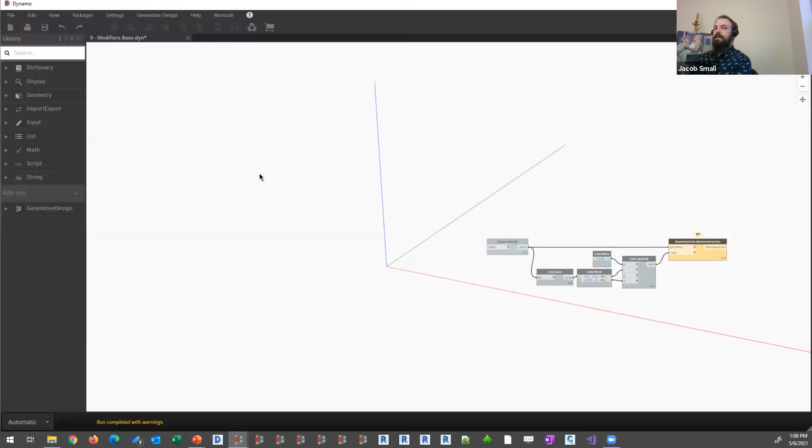Feel free to add in anything else while I spin up over here and launch our first demo. I wanted to add that if you've been paying close attention to the last couple sessions, there is a speed difference between creation of abstract geometry and creation of physical types. But there's also a speed difference when it comes to taking an already created thing and moving it to a new place. So the ability to take a created sphere or cube and move it somewhere else is going to be a little faster than actually creating that cube in another place. So if you're looking to replicate geometry across different places, utilizing these abstract methodologies such as translate will net you a speed gain in Dynamo as well.

So the specific section of the library we're going to focus on today—because any particular geometry type may have its own modifiers, so if you go into curves there's a way to modify curves, if you go into surfaces there's a way to modify that—but the session today we're going to focus in real tight on the modifier section under geometry. So geometry, modifiers, geometry primarily. You'll see all the different nodes we're going to cover today are listed out here.

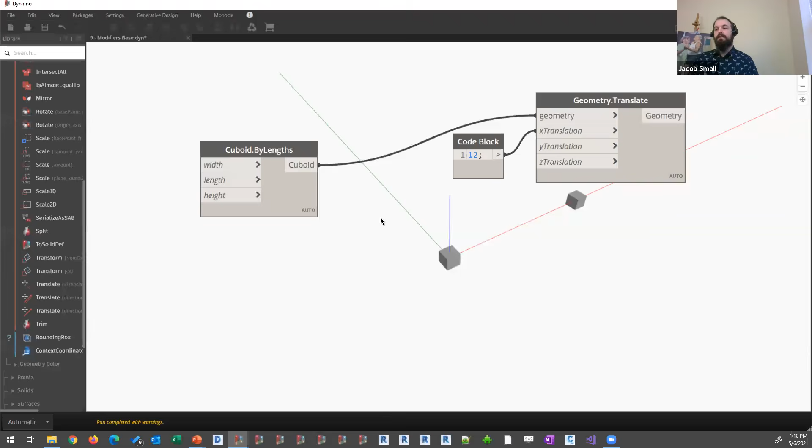We're going to start by going over these translate nodes, and this is going to really demonstrate what we mean when we say non-destructive. I've placed my first cuboid here. You can see what happens when I select it, it gets that blue highlight. Now I'm going to move this with the geometry translate node on an XYZ value. Let's move this on the X axis by just 12 units. We wire that into the X. 12 units might have been a bit far based on how I was looking, but you can see I now have two cubes—the one I've moved and the one that was previously created. This can be really useful because I can always go back and reuse the previous cube, or I can continue to manipulate the geometry I created before.

The next method of translation is by just direction. So in this case, we'll take the cuboid, wire this in, and this needs a direction. You can see when I hover over it, it says I need a vector. We can quickly make a vector by coordinates. We'll move this on the Y-axis by, I don't know, 10 units seems like a good value. And you can see once again another cube was created, this time up here.

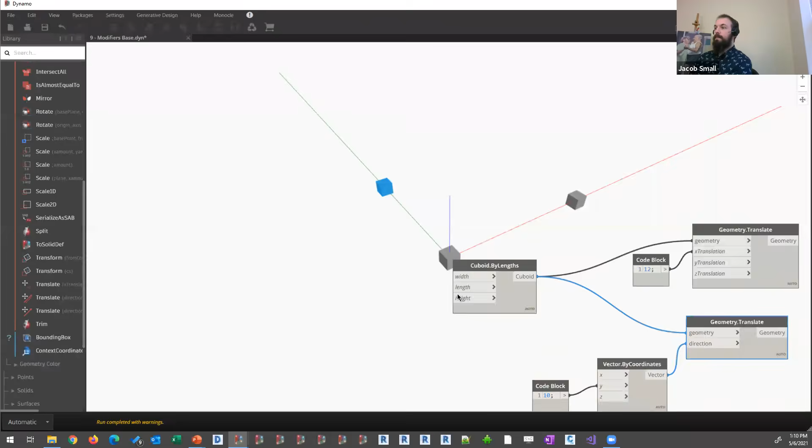One more cube that we're going to try and make here, and we're going to leverage the last translate method, which is by direction and distance. So as opposed to just saying what's the path that you want me to move this shape, or how far on the X, how far on the Y, how far on the Z, this is going to say take that geometry on a given path. We'll move this on just the Z axis.

And how far would you like me to go on that path? Let's move it by 5 units, seems like a good number since that's where my finger landed. You can see we've now created a fourth cube. So now I have 4 different cuboids, but I can always go back to any one of those and manipulate that one. So rather than manipulating the first one, I wanted to manipulate this one.

Whoop, helps if you wire stuff into the right data type. You can see we can move those different pieces around. So that's what we mean when we say non-destructive.

All right, I'm going to leave this up on screen now, and I'm also going to change this to be a little bit narrower of a value. Let's go to 0.75 on my X, Y, and Z values.

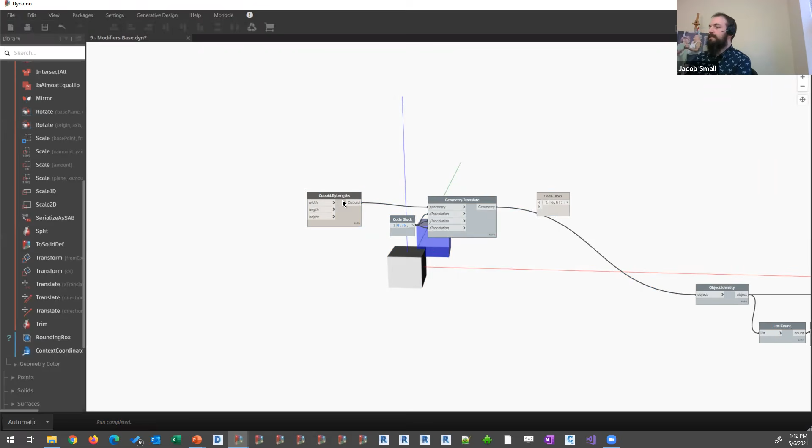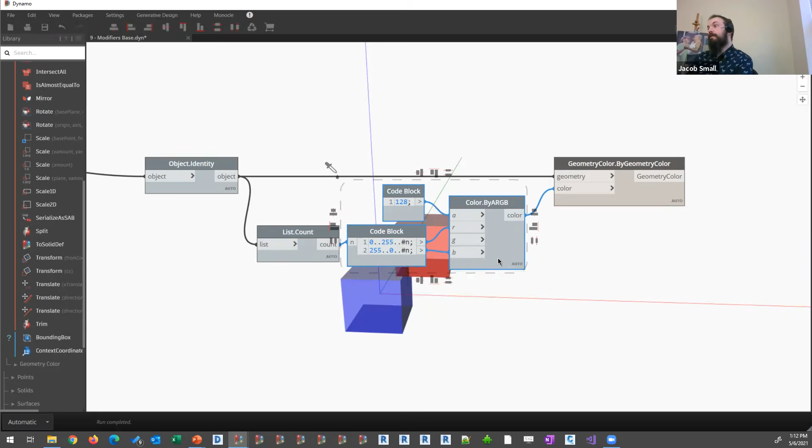You can see how those two pieces sort of pull together. And then I'm also going to do one last piece. I'm going to wire this in so that we can see these pieces in different colors. Let's take a quick list here, A and B. I'm going to wire this in as index A and this in as index B. This should allow us to more easily visualize the different geometry shapes as we continue to get into our different modifier types, coloring one piece of geometry one color and the other piece the other. This was done with a simple color by our alpha RGB value nodes and geometry color by geometry color node.

All right, so our next piece is split. Split is basically going to take 2 different pieces of geometry that interact in some way and pull them apart into separate pieces. So this is how you get a hemisphere from a sphere, a grid of squares from a surface, non-overlapping segments from overlapping segments, and so on. It's going to give you both halves of those 2 individual pieces, so it's not just the pieces that overlap, not just the difference. It's going to give you the combination of the two.

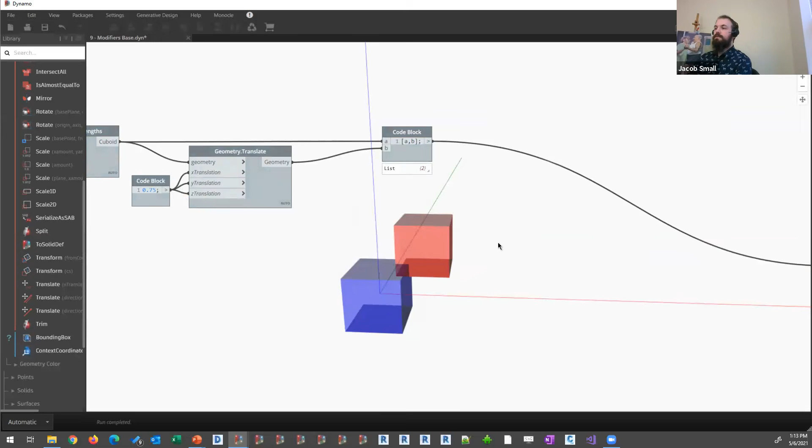So to do this, we're going to take those 2 nodes we had before. I'm going to come back into our geometry library. Once again, we're under geometry, modifiers, geometry. We'll pull out the split node. I'm going to take our first cube, which I've named A, that's the blue cube, and our second cube, that's B, and wire that in as our split. We'll turn off the preview on this, and then wire this into here.

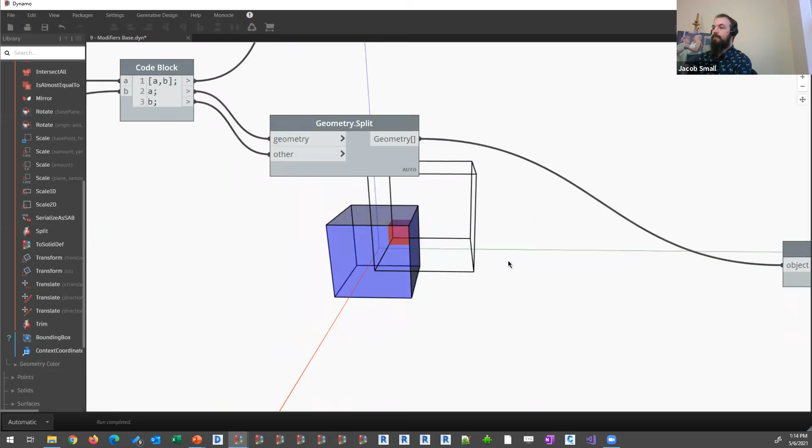And you can see this is now coloring the 2 individual pieces. Now it can be a little hard to understand where stuff came from, so I'm going to do one last thing here. I'm going to take my list of A and B, and we'll quickly pull the edges so we can visualize where stuff came from. And then from each edge, pull the curve geometry. So these were the original outlines of those 2 cuboids. You can see the piece remaining in that red cube among those 2 is the piece that is kind of overlapping where those 2 pieces intersect. Let's disable the translucency so we can see that a little clearer. Hopefully that makes some sense.

Anything to add to that one, Sol?

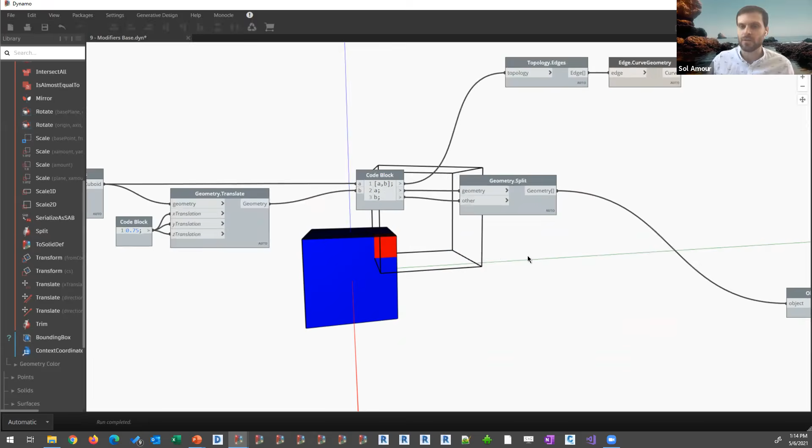Just one thing, which is you'll notice there are multiple different ways to do things inside of Dynamo. In terms of the translation that Jacob showed earlier, there were 3 or 4 different methods you could use to do that, and they're all useful in their own right in different ways. It doesn't matter which one you use, so long as you get the result you want. But sometimes it's better to do it with math, with vectors; sometimes you might want to just give it pure numbers for XYZ translation. That'll be a common theme with multiple of these different modification methods in Dynamo—there may or may not be multiple different options that best fit the problem you have at hand.

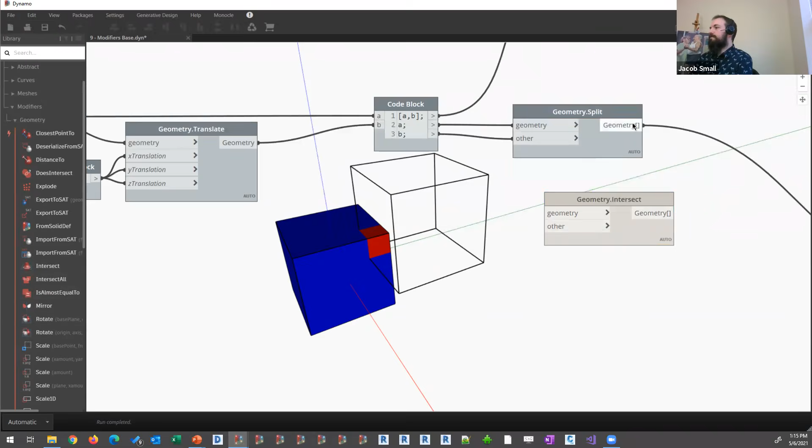So that's the geometry Intersect node next. I'm going to go into my geometry menu, under modifiers, and select Intersect. We'll wire this over, no need to disable previews yet. We're going to take Shape B, our red cube, the upper cube, and Shape A, the blue cube, the lower cube. Notice I now only have one cube remaining, shown right down there. The reason for this is it's looking at just the combined pieces of geometry that are common amongst the two pieces input into this node.

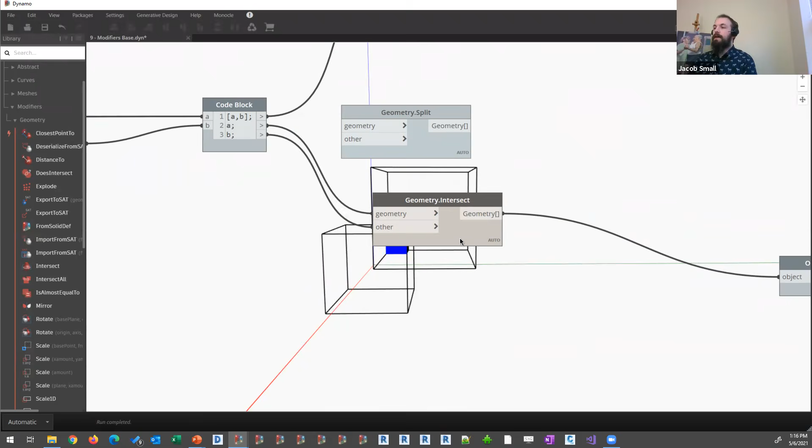On to DoesIntersect. The way I like to describe it, it's built-in clash detection, because everybody likes to make sure their model is coordinated. No new geometry is actually created with this one—it's just going to tell you if the two pieces touch. So we'll come back here and take our DoesIntersect.

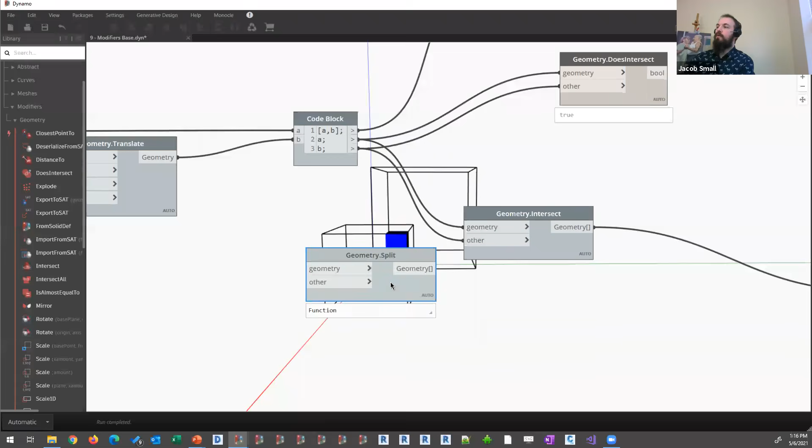Again, this takes our initial geometry. We're going to take Cube A, originally the blue one, and Cube B, originally the red one. You can see it just produces a quick true or false value. In this case, the two pieces touched. But if I modify this cube I moved—the red cube we shifted out of space—if we moved it by 2 units instead of 0.75, the two cubes are now located a bit further away, and you can see they no longer touch. So there is no intersection, and that Boolean is now going to return false.

I often see this used in combination with a List Filter by Bool Mask, where if I had a bunch of cubes in space and wanted to know which of them might touch this other shape, we could quickly do a DoesIntersect and then filter by Boolean mask to pull out the content that just intersects the shape we're targeting.

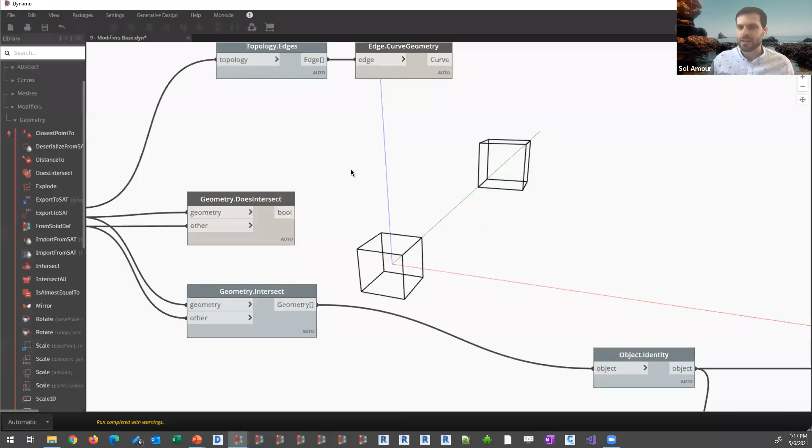Anything to add to that one, Sol? Yeah, if we're talking about clash detection, a real world application is that you really want to use these abstract types. DoesIntersect could be considered an abstract type you use first before trying to connect every single thing to every single thing—it's like a filter or a pre-pass. You want to go and collect only the relevant things to each other, so you can see if only things intersect, then potentially join those geometries in the Revit space, or do some downstream Dynamo operation with them. What you want to avoid is trying to do every single thing to every single thing at the same time, because the bigger your problem space or the more geometry you're using, the slower things get, purely from having to compute those things. If you pre-pass them and say I only want the things that are touching, Dynamo doesn't need to consider anything else. You just do a filtration pass with a List Filter Boolean node, and then you only work on the actual things you care about at any given time. Cool, well said.

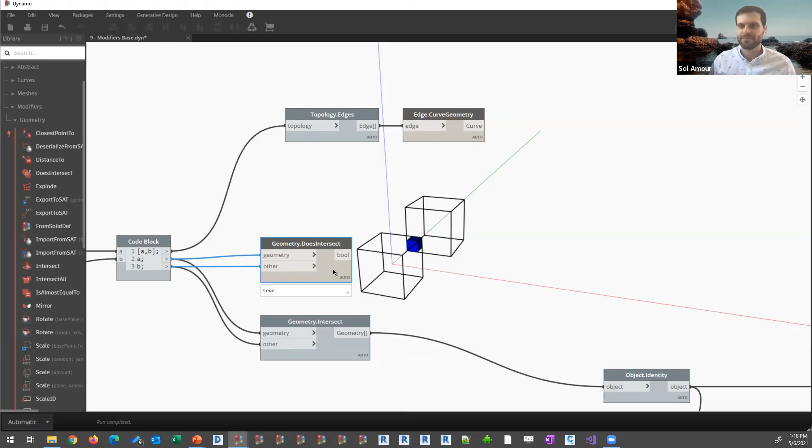Next up is Explode. Explode is pretty much what you might be used to in AutoCAD or perhaps even Revit if you're doing CAD imports, where we basically pull the core components that make up the geometry. This allows us to expose the primitive pieces that make up the larger, more complex shapes in a pretty direct manner. I use it pretty often for stuff like, if I'm not sure whether I'm going to have a surface, a polycurve, or a cuboid, we can always just do a quick geometry explode and quickly understand what that thing is made up of.

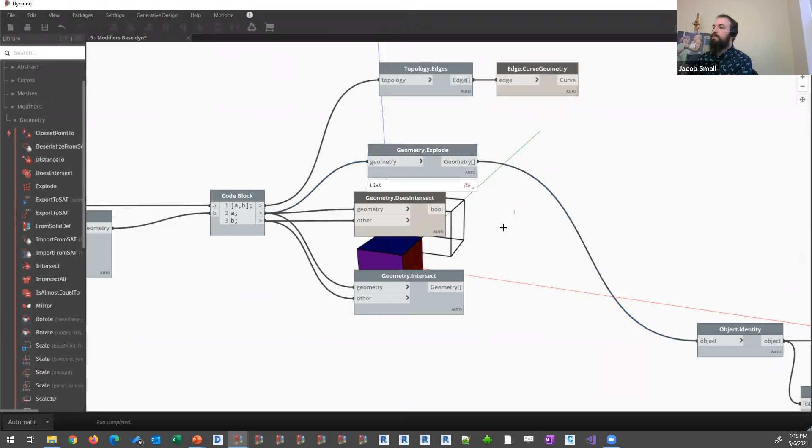Once again, looking at how that works, we'll take the geometry explode node from that same section of the library, and we can explode an individual piece, which looks like this. Now when I wire that in down to here, you can see we're going to color each one of those cube faces a different color, varying from very blue at the top to very red on the backside.

Right, so that's sort of the order that those cuboid faces were created. If we did want to do this on a larger sequence, we could wire this in. But notice I'm now coloring one cube blue and one cube red, even though if I look at my data preview, this is a larger set.

And that again comes back to our list structure, right? So if I look at this, we're lacing all of my red color gets mixed with the first item in the list, and all of my blue color gets mixed with the first item in the list, all of this stuff. Then all of my red color gets mixed with the second list. So if we wanted to individually color those faces, we'd have to use those flattened nodes.

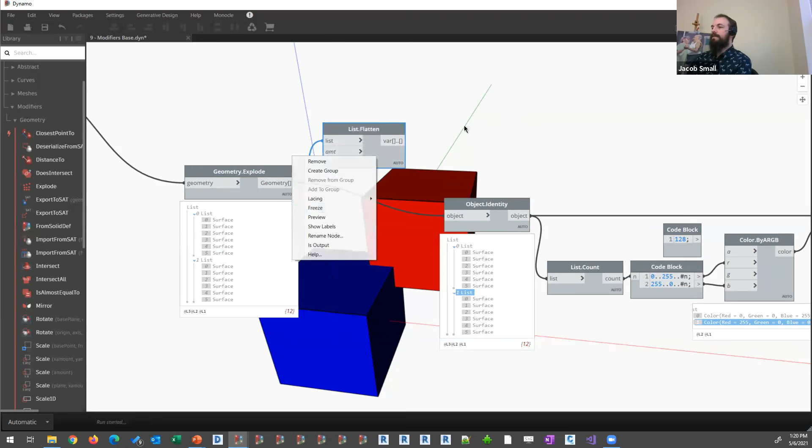This is why we covered some of that other core list management stuff. This is why we covered that list management stuff before we got into geometry manipulation, because it's really tough to do a lot of stuff if you don't have that understanding background of where stuff comes from.

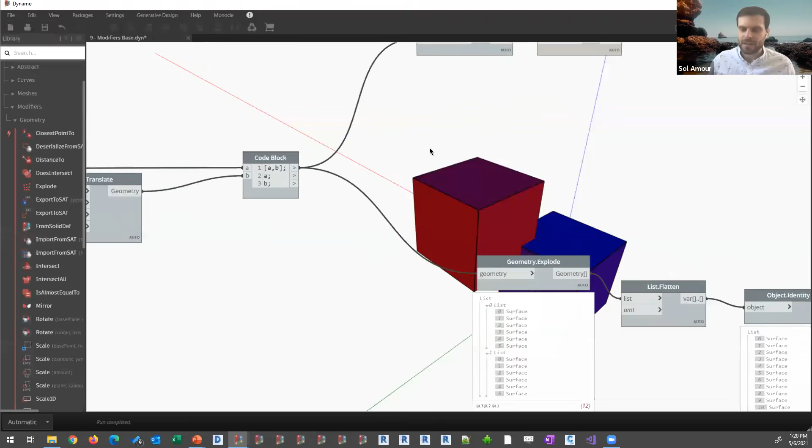Anything to add, Sol? Yeah, so geometry explode can be really useful just to get down to the baseline components, like Jacob said. So if you have a NURBS curve or a polycurve, in this operation you should be able to explode these into some baser components. Sometimes you'll get what's called just a curve, which is the higher geometry class inside of the curve space, and to get from a curve to something real, you probably want to use the geometry explode node as well.

All right, on to mirror. We're going to go through a couple modifiers now that are really similar to what you might be used to seeing in your CAD and Revit command base. So for mirror, basically you just define what plane you want to mirror about, and it's going to take the geometry and create a new copy of that geometry on the other side of that plane.

Unlike Revit, there aren't as many concerns as you might have in your typical BIM world, right? I always get upset when I see somebody mirror a plumbing fixture because now my hot and cold inputs are on the wrong side of the fixture. The flushometer's on the wrong side. That leads to ADA concerns, accessibility concerns and stuff like that. So one great thing about being in the conceptual environment is you don't have to worry so much about that.

But the way this node works, I'm going to go ahead and place one of them on the canvas. You can see it here. So it takes our initial geometry, but to use this we also need that mirror plane. So I'm going to take the list of both geometries, wire this into the flatten. I'm also going to turn off the preview on this. And I now have to quickly build up a plane.

If we remember, planes are under our geometry abstract section of the library. We'll build one by origin and normal. It automatically uses the default input, but let's go ahead and create a point by coordinates at, say, -5 on X and -5 on Y. We'll use that as the origin, and then for normal we need a vector, and we'll do -5 on Y and Z.

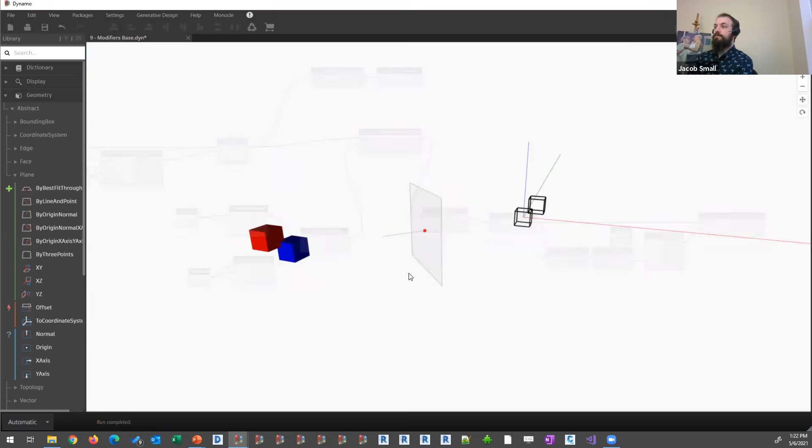Now when I look, let's actually change that to here, so you can see how that places that location. And now I can wire this plane up into my geometry mirror node, and the two cubes get flipped right over to the other direction, right? So this can be really useful if you have larger sets of geometry that you just want the inverse of, or if you only want to model half of something, just like in the CAD days where you might trace out the right side, and then go ahead and mirror that over and get the other side of the Corinthian column or whatever else you may be modeling.

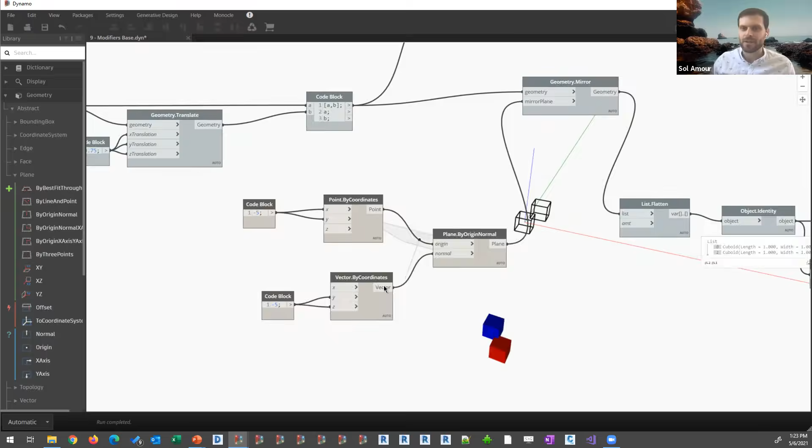Anything to add, Sol? Yeah, just like I added previously, a mirror event will be better than creating this again from scratch. So instead of copying and pasting all of the nodes up top that Jacob used to create the geometry in the first place, and then trying to make sure that's created in the mirrored location, simply using geometry.mirror is a more effective action in terms of resource consumption inside of Dynamo. Yep, cool.

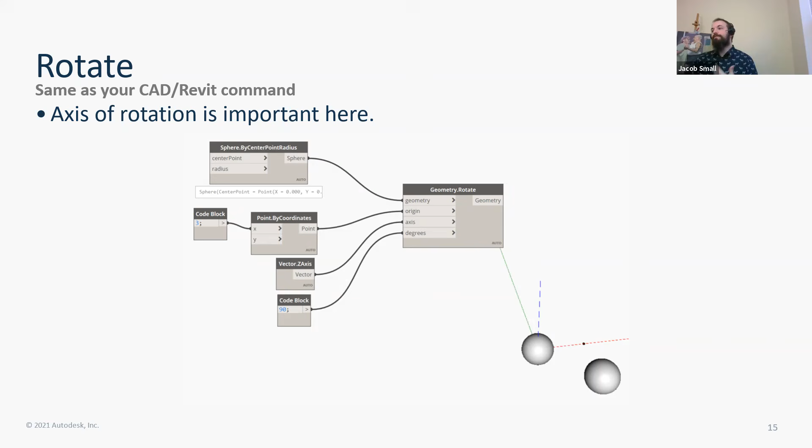Next up, we've got rotate. Axis of rotation is really, really important here. A lot of times people don't understand that they've always been defining the axis of rotation in their other applications. If I go to rotate in Revit or AutoCAD, it's typically going to assume that the axis of rotation, after I pick my rotation point, is perpendicular to the view. It's going to take the view I'm currently looking at and rotate the thing about that point. We don't have as much of that option in Dynamo because there isn't really a hard-coded view. The view is derivative of the model content that's been pushed through. So as a result, we have to define what that axis is.

So there's actually another rotate node. We're going to show both. I'll start with rotate by base plane because I already have a base plane here. I'll turn that on so it's just on the Z-axis, and set that to positive, just because that's how I think. So you can see the plane we've built here. I'm going to use that as my base plane, and we'll rotate this geometry by 90 degrees about that plane. We'll wire this down so we can see how our cuboids rotated around. You can see there's a 90-degree rotation - the former blue cube was over there, now it's over here, and the red cube is now over there.

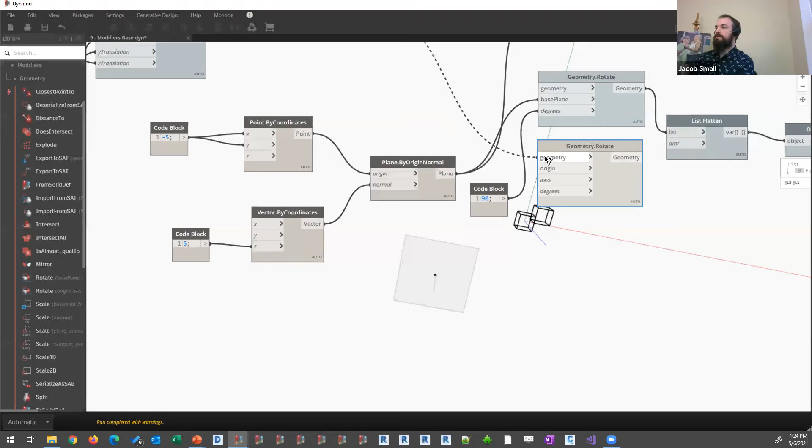And then there's a similar node, if you didn't want to take the time to build up a plane - this is the one I illustrated earlier. It takes our geometry, an origin, an axis, and a degrees setting. You can see I literally reused the same stuff I built that plane from - Dynamo's just simplifying the content that's been provided.

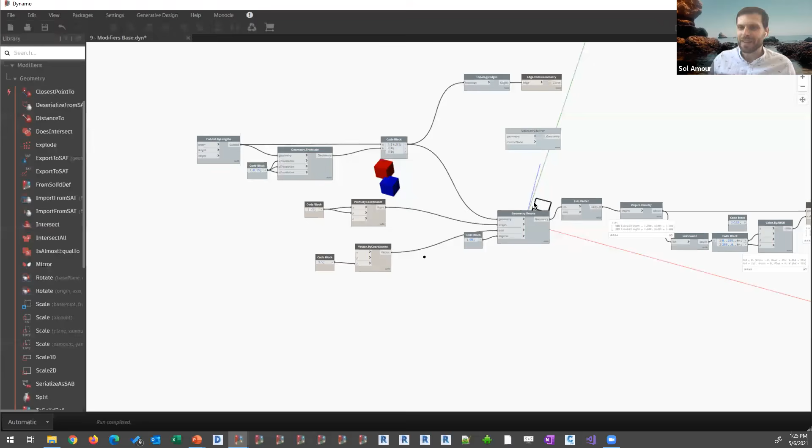Anything to add there, Sol? Nope, I think conceptually these pretty well make sense to most people who work within the AEC space. Rotation is rotation. All you're doing in Dynamo is actually having to define, like Jacob said, all of the input variables to say how your geometry rotates - or in the case of mirror, how your geometry mirrors, and all the other modifications of geometry we have here. It's a little more granular, but it gives you really high degrees of control as well.

Cool, all right, and then next up after rotate is scale. Oh, we've got a train wreck, sorry about that.

So you want to be real careful about the version of scale you pick out. A lot of times the scale node is going to default to scaling about the internal origin, the hard-coded 0,0,0 point. You can see that happened here, where we took a point at x-axis 5, y 0, z 0, put a sphere around that, scaled it up by 5 units, and now the center of this ellipsoid is actually 5 times 5 away - 25 units from the origin - as opposed to the previous centroid.

One handy fix for that we'll show off here. So I'm going to take the scale node - we'll take just this one to start with, and take our original.

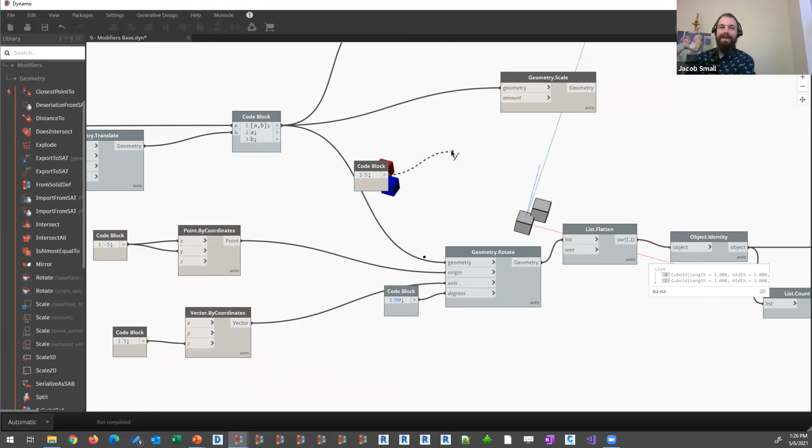Well, Jacob, I think we've lost your voice. Yes, he went quiet - I must have muted myself. Sorry about that. No, I'm so sorry, that was me, I was letting someone in and did that by mistake. Sorry. That's fine, hopefully we can all hear me now.

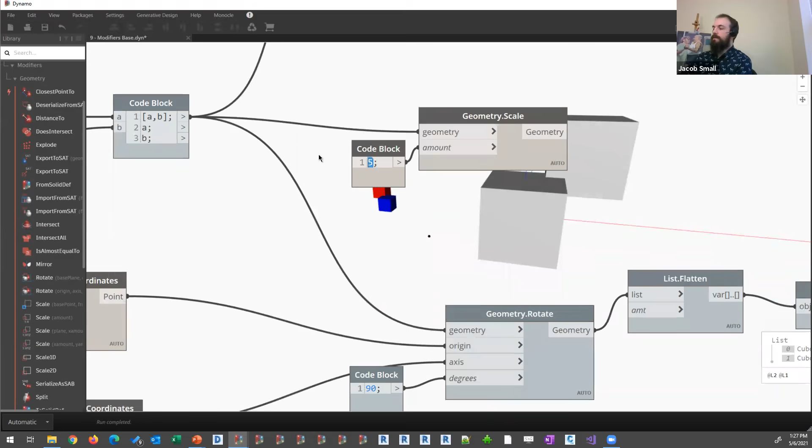So what I was saying before is we're going to start by just scaling this piece up. Again, you can see these have now completely engulfed the previous shapes. I'm going to use a smaller number - let's go 0.25. Now you can see it's still scaling about that origin. If we wanted to scale the cubes about their centroid, we'd have to use a different method.

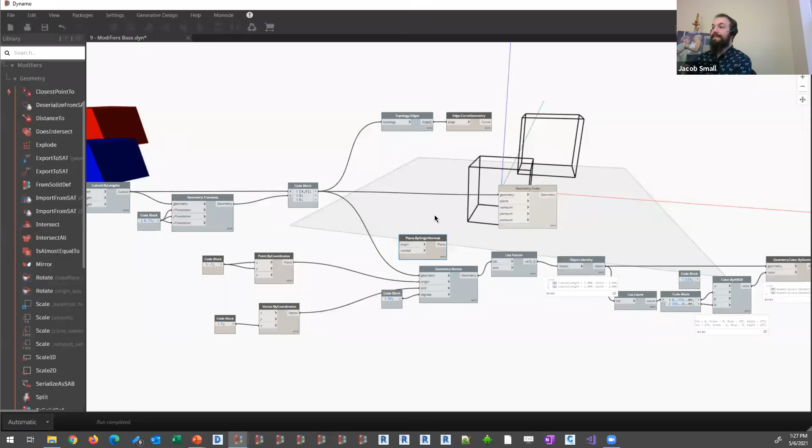For that, I recommend this node, which takes our geometry - we'll take our list of cuboids - and takes a plane. We can quickly define our plane by origin and normal. Now it does need an origin point; what I use for that is the solid.centroid node.

This will take the centroid of each of those solids. We're using the list capabilities of Dynamo to make sure we return both individual pieces, use that as our origin, and now use that as our plane. We're going to scale about that individual piece.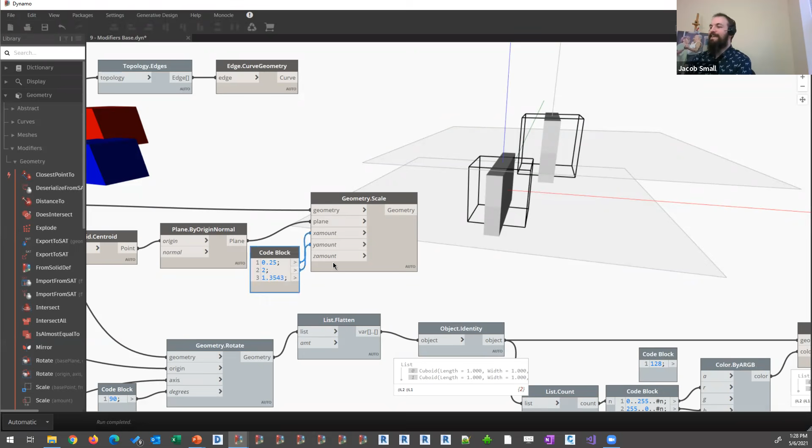So now when I type 0.25 on my X, we're scaling it on just the X value by 0.25. We could scale it by 2 on our Y and some other number. That's too big of a number. I meant to put that decimal point much earlier on our Z amount. And then this content can move itself the rest of the way through the larger portion of the graph. So you can see how that all worked out.

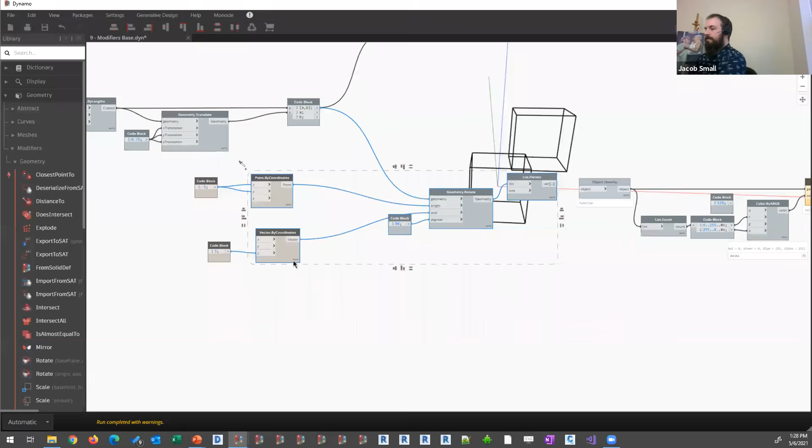Next up is trim. Trim is going to be similar to our split command, and I actually recommend learning how to use the split command a little bit better first off. So we're going to start by clearing up our canvas a little bit.

And then we're going to pull the trim node on the canvas. So the order of inputs absolutely matters, both in terms of the geometry and the point and where that point sits. You may find that you wind up using origin points, centroids of solids, minimum or maximum points of the object bounding box, or vertex points. But it's really key to manage that content the rest of the way through in terms of how it works.

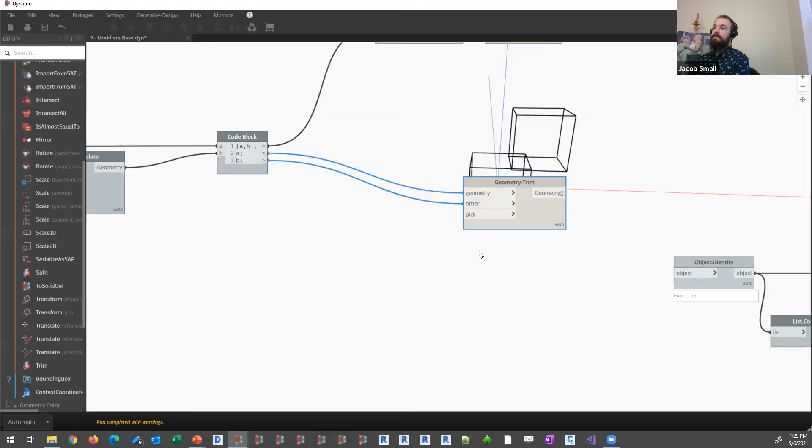So we're going to take our A geometry as our first piece. Our other piece is going to be the B. And then we need a pick point. I'm going to use the solid.centroid node once again, and I'm going to use this on the B geometry.

And now you can see the shape that this took. It bit that section out, right? If I used a different point, if instead of B's centroid I use A as the centroid, it's going to remove the other piece, because it's going to remove the piece that's closest to that other piece.

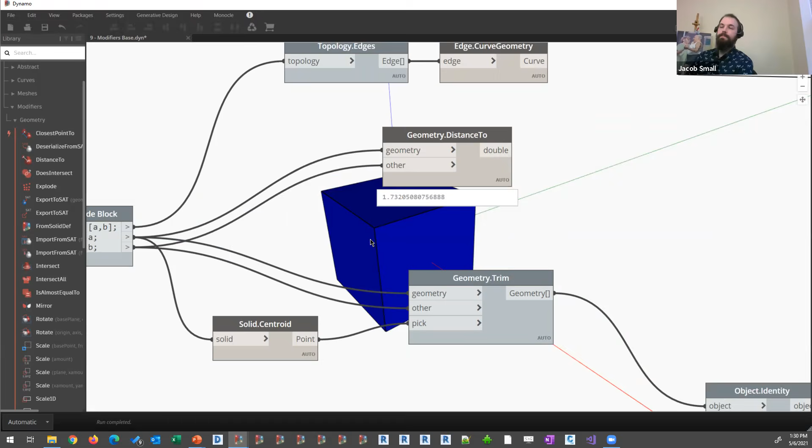But if I start to extend that distance, set that movement distance to 2, you can see that value is 1.73, right? And what actually happens—this is another great node that's not in my PowerPoint presentation—is closest point to.

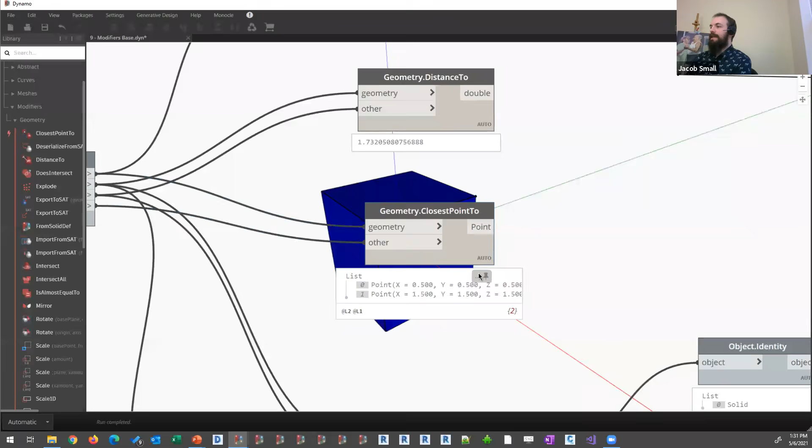We can take our AB points as one set, and I'm actually going to then make our BA list, the reverse of the other list, as the other set, and then ask what's the closest point between these two points. And if I turn off this preview and my solid centroid, there you go. You can see the two points that I created are there and there, and those are the points that are closest between.

And sure enough, if I quickly build a line by best fit through that list of points, and then say curve.length, you can compare those two distances, 1.73 and 1.73 — we're getting the exact same piece. So we could do this geometrically like this, but it's definitely much faster to just use that DistanceTo node.

Anything to add to that one, Sol? Nope, those last two are pretty well covered. All right, so Thomas, I don't know if we got you unmuted or not. I'm unmuted, yes, but awesome — I have no headphones selected.

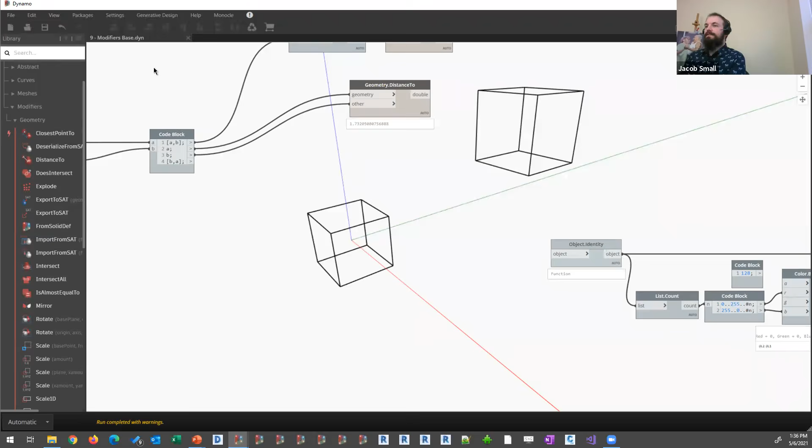Alright, let's get into the live demo because I have some fun stuff we want to show off today. I'll go ahead and save this, and we're just going to start a brand new file from scratch.

If anybody has any questions as we go, just put them in the chat or raise your hand. We can talk through stuff as I build it up. I'm going to try to go pretty quick through some of this, but I'll describe what I'm doing as I build it up. So the first thing I'm going to do is build some points by coordinates.

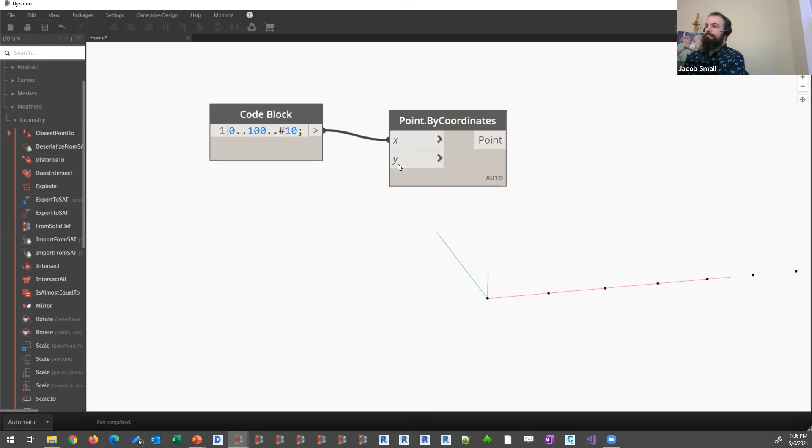I'm going to do it on just the X and Y axis. We're going to build a range from 0 to 100 with 10 steps in between. When I do this, I'm going to wire it into my X and Y value. Notice I'm just getting a line of points - that's because I have to first change my lacing to cross product. Now I have this 10 by 10 grid.

This 10 by 10 grid is going to form the basis of my larger design piece. You can see the list structure that's been set up there - it's 10 sublists of 10 points. Next up, I'm going to take a number 10 and use a List.OfRepeatedItems node. We're going to take the number 10 and repeat it 10 times, and I'm going to use this to generate some nice random numbers.

We're going to use a math.randomList node. Since I have 10 groups of 10, I now have 100 numbers in groups of 10, just like I have 100 points in groups of 10. But these numbers are kind of small, right? They land somewhere between 0 and 1. So I'm going to do a quick multiplier to those. We'll multiply these by -10, so these numbers are going to be lower than 0 in all cases.

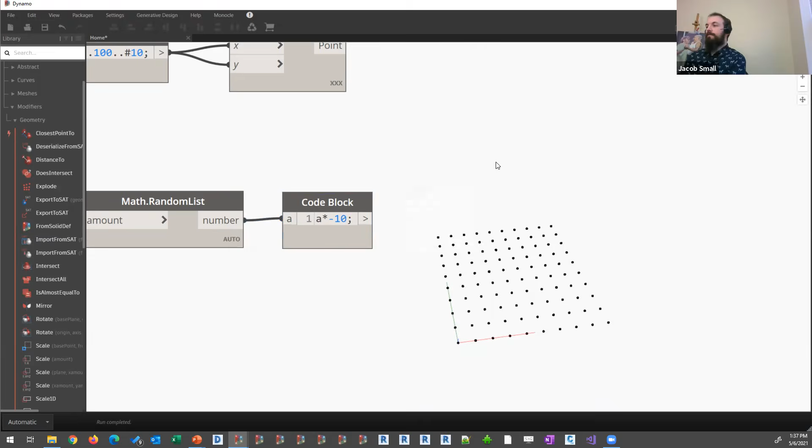Now we're going to start to use our first geometry modifier, the geometry.translate node. I'm going to translate my initial set of points on the z-axis by that value. And now I've got something that looks kind of interesting, right?

So we've got this thing that looks maybe like a really loose point cloud of sorts. Well, now, since I've got that in that sort of list structure, we can start to build a new type of shape. We're going to go into our surfaces, NURBS surfaces by control points. And now I've built kind of a topography sort of shape, and that looks pretty good. I want to now do a little bit of cleanup on my piece here.

We're going to hide all that geometry preview. And I'm keeping an eye on the chat too, so if anybody has any questions, again, feel free to speak up.

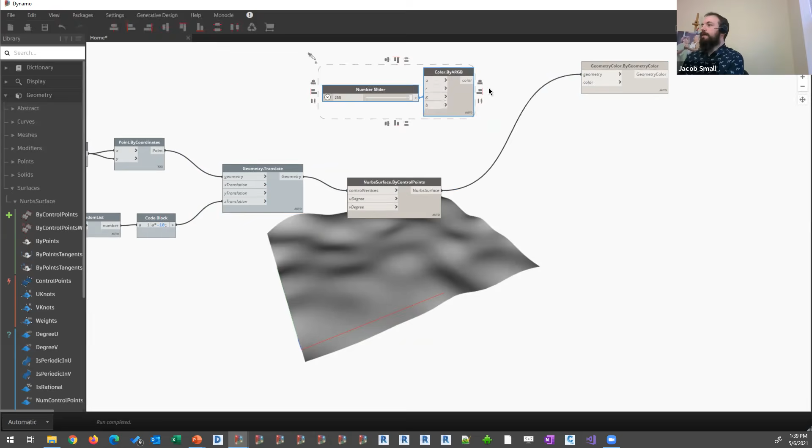With this individual surface, let's try and get a good color here. We'll use a geometry color node and set a color to 255. I did use the node autocomplete feature there to quickly grab the color I was after—by holding down Alt and clicking, it pops up the common input. I'm going to use the number slider for this as well, set this to, I don't know, 128, halfway translucent.

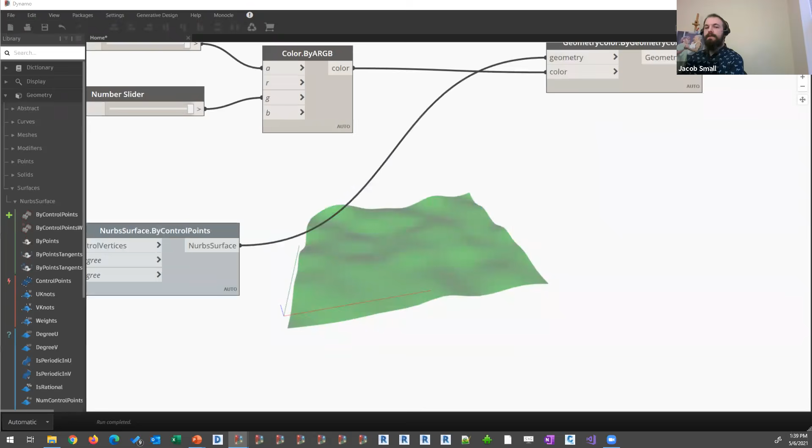And we'll turn off this preview so that we can just see my translucent landscape as it may sort of fall through. And now with this, we're going to start to look to populate some stuff. The thing that I actually want to populate is some fun cubes.

So to do that, I have to first build up a cube. We'll pull this node down here to give ourselves a little bit more space. I'm just going to use a cuboid by lengths node, keep it very, very basic—dimensions of 2 seems good. And you can see I've got this cuboid and it's all the way down here at the origin, right?

Now, we mentioned this node in particular, the geometry.transform node, previously, and that's what we're going to actually leverage here, kind of at the high level, to make sure stuff really syncs. So what I'm going to do is say, let's go ahead and build a surface coordinate system at parameter node.

I'm going to take our surface here and build a range from 0.1, because I want to hold it a little bit off the edge of the surface, to 0.9 on my U value and my V value, right? And we see that sort of pull through. Notice I'm getting just sort of one piece—let's set my lacing to cross product.

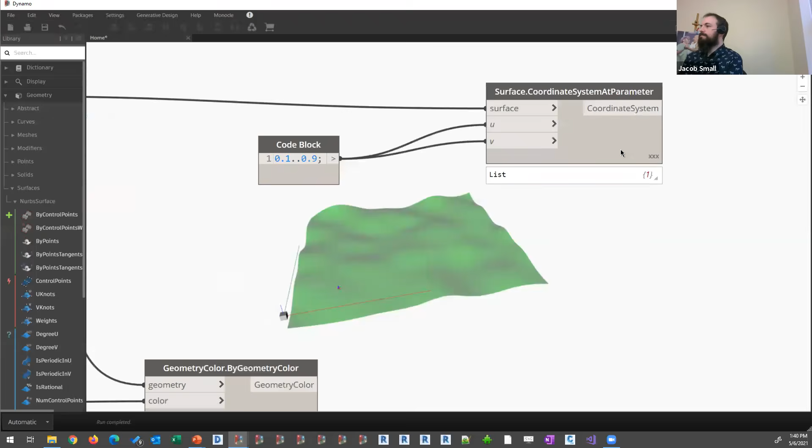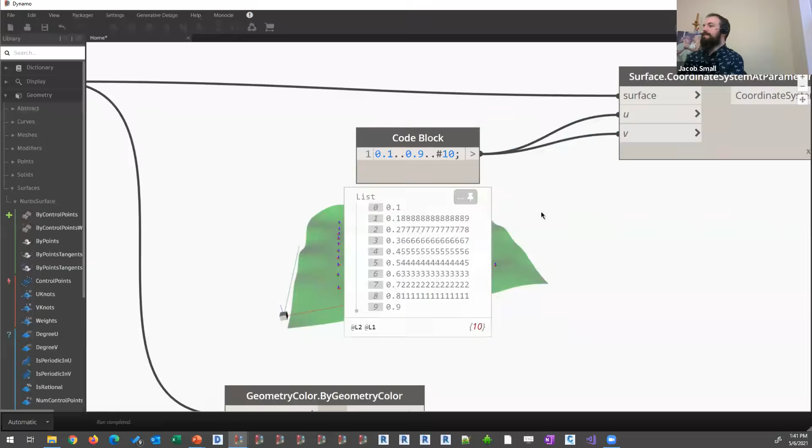I think I may have—you need an amount. I need an amount, you're right. I need to say I want 10 of these, because as it was written before, it was just giving me just the one number. There we go. So instead of just giving us 0.1, we need to say give me 10 values in between those two steps. So now you can see we've got those 10 shapes all in a row, and I now have an entire field of coordinate systems.

And you can see those z-axis, the blue sort of lines, are following perpendicular to that surface. So whatever that was, if I had a different random shape, we're going to get different z-axes, which is pretty cool.

And Sol mentioned before, the idea of rebuilding content is often going to be slower than just taking information from content. So what I'm going to do is flatten this first, so we've got a fresh place to start instead of having a nested list. We've just got those individual values.

And now we can come into our abstract menu. What do we know about coordinate systems? One of the things we can query from them is their origin.

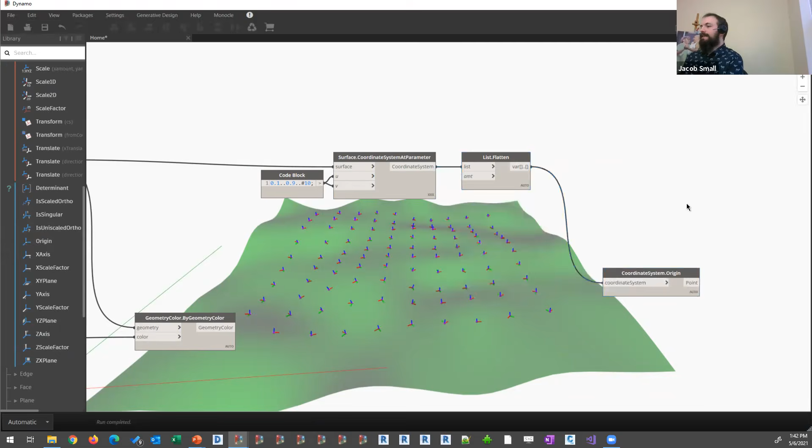And now I can take that origin, and this is an actual point, it's a geometry piece. I can now go back into my geometry modifiers menu to take the distance from this point to another point. And it's actually this list of points.

So let's build a quick point by coordinates node. You can once again just keep that on the XY value. And I'm going to keep these values between 0 and 100, but for now I'm just going to set them somewhere in the middle. And we're going to use this as an attractor point to sort of deform those values.

So I can take this curve, this point, and sort of move it anywhere within the domain of my landscape.

All right, now I'm going to do a quick bit of remapping of our range. So we're going to use a math.remapRange node, which takes a list of numbers and sets the values between what they were before and a new number. So I'm going to set this from 0.5 to 5. And this is going to allow me to get this sequence that's now the biggest distance that I have here is 5. The smallest distance that I have is 0.5, right?

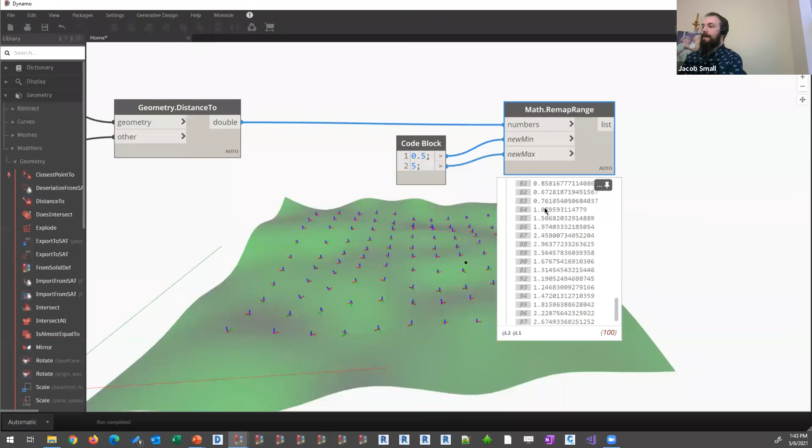But I'm going to do this not for sort of one individual piece. We're going to actually do up a series of these. So 0.5, 0.01, and 10 as my first minimum. And my next list is going to be 5, 0.99, and 255. The first list of numbers, right?

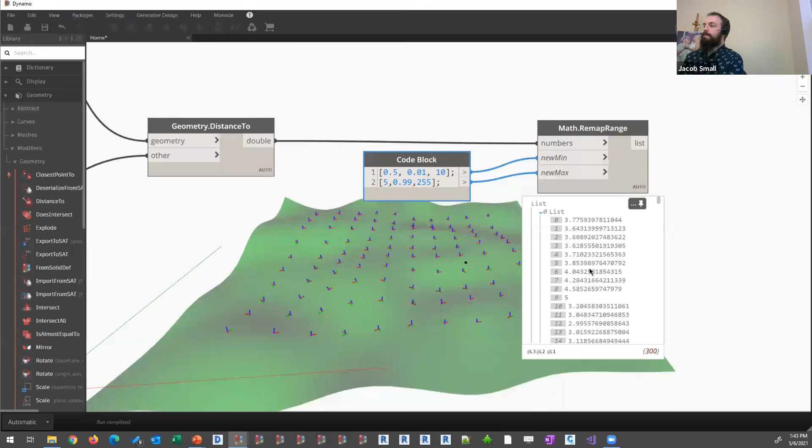So I've got 3 lists of 100 numbers. The first list I'm going to use for scaling. The third list is going to sort of define my color. And the second list is going to define the radius of some additional deformations that we're going to make.

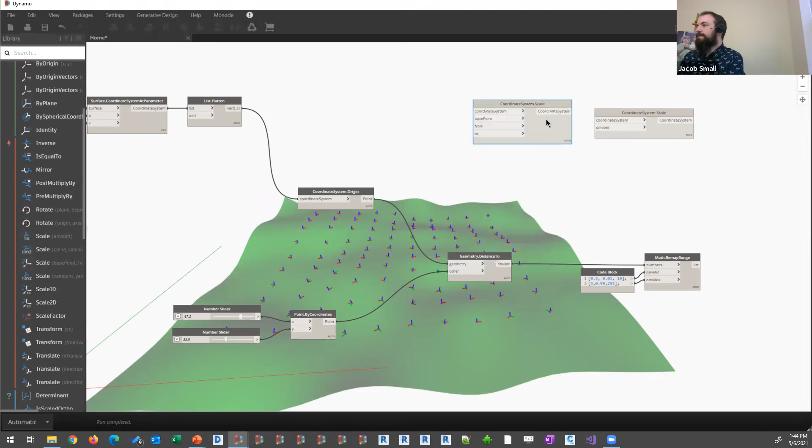All right, so now with my coordinate system that I've created before, let's go ahead and we'll take that coordinate system... nothing in the chat. We're going to scale up that coordinate system, back under coordinate system scale. Wrong scale. By base point, no, still the wrong scale. We'll use the plane.

Take our coordinate system, take its XY plane, and then I'm going to scale it up by that first list. We're going to pull this out of that list of numbers, wire that in. And we'll do that just on the z-axis so that we can really see how that scales. So now you can see that blue line gets longer as we move further away from that point.

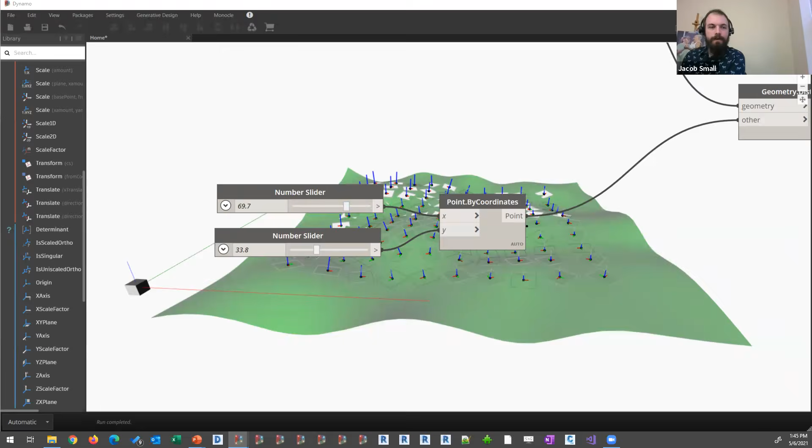So what I'm doing is I've built this as an attractor point, so we can start to deform what that value might want to be. Final goal is to populate some shapes through this landscape.

And you could think of these shapes as trees. I think of these shapes as things suspended in Jello because that's just a little bit more fun for me. But whatever you might have that you want to just sort of populate through, that's what we're building out. So now I'm going to take my cuboid and take that coordinate system, and I'm going to use a geometry.transform node.

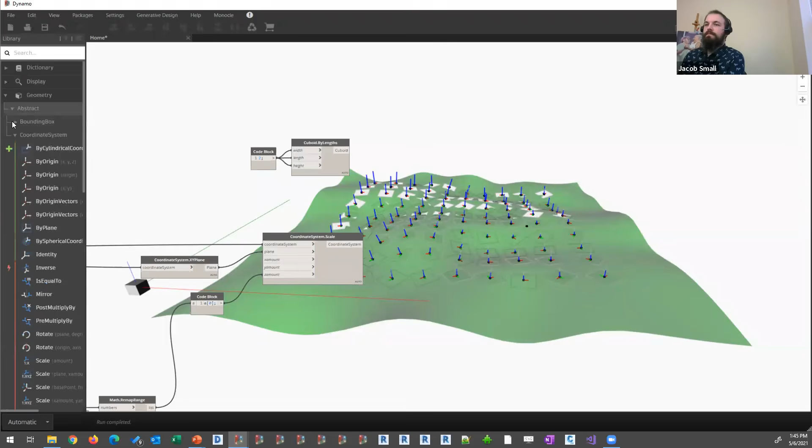I'm going to use this one. It's once again under the geometry modifier section. So it takes the geometry as an input, feeding it one cuboid in a whole list of coordinate systems.

And notice how these are now sort of always perpendicular to that original surface. And they're scaling up in terms of their height based on how far they might be to this attractor point. So if I move this attractor point around, my cuboids quickly change shape based on wherever I might put that.

I'm going to go ahead and turn off some of this other stuff so that we can see this a little bit more clearly. There we go.

Now we can continue to use this geometry. We can continue to modify it. So the next piece that I'm going to do is let's try and sort of flatten this stuff out. I'm going to go ahead and fillet this. So you can fillet a solid, which is pretty cool.

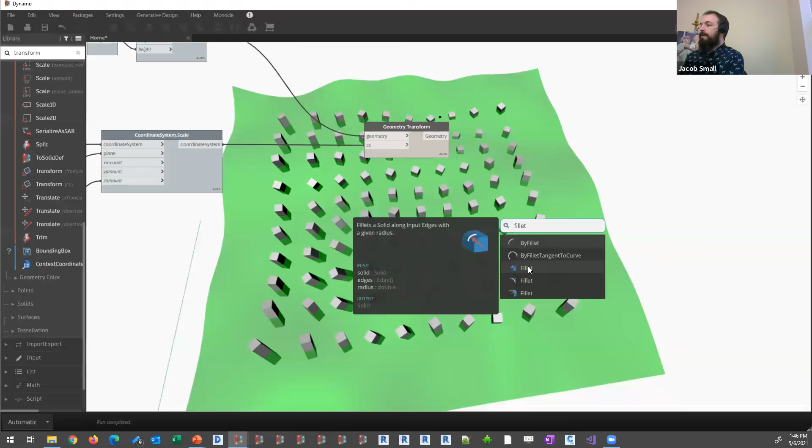It takes a geometry, it takes a list of edges and a radius. So I've got a radius down here. I'm going to use that as a bracket 1 in this list of numbers. This goes in as my radius. And now I need to get edges. Topology.edges.

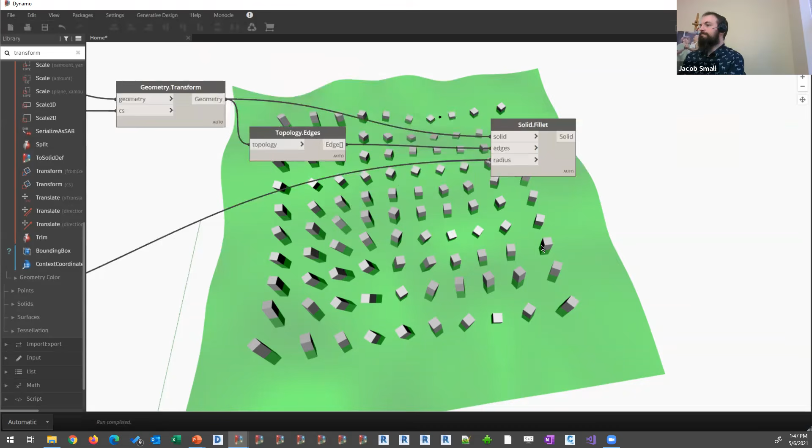And if I hide my previous transforms, notice I'm getting rounder as I get further from my attractor point, right?

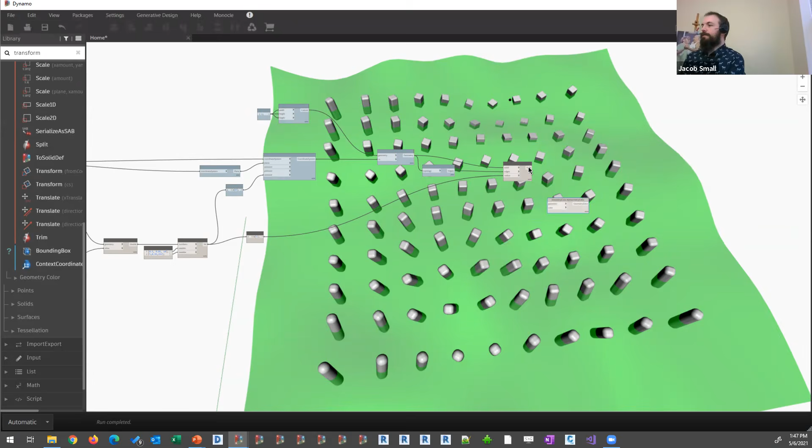Now, the next step is let's try and get this some color. We'll build a geometry color node. We'll take our individual solids. And then I've got one more node down here in this math remap range.

Color by alpha RGB - this is going to be our R, and List.reverse is going to be our B. This wires into our color. Now you can see taller, redder, and rounder, shorter, squarer, flatter, and bluer for the ones that are closer to our attractor point.

And we built it live in, what was that, 15 minutes? 20? I wasn't really paying attention to the clock.

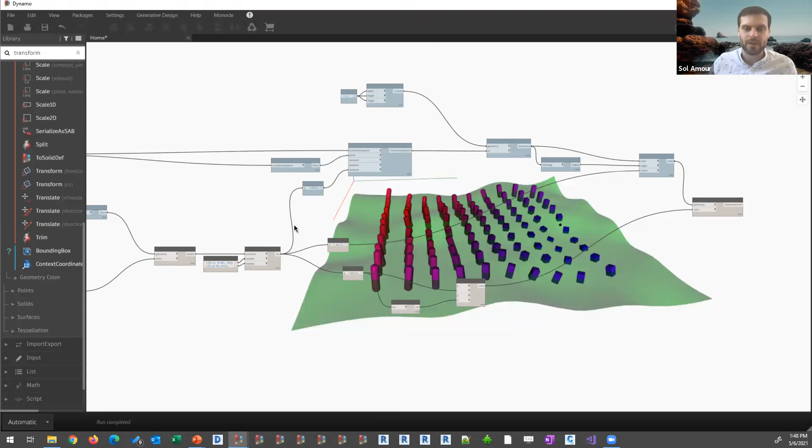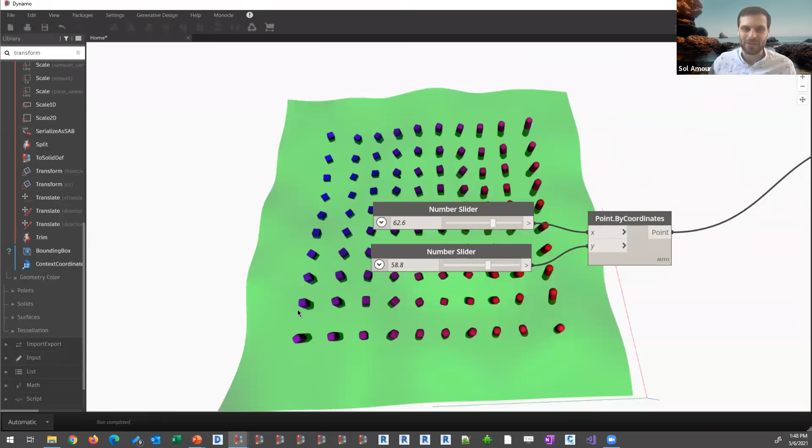So if anyone has any questions on what Jacob has just live demoed right now, please feel free to reach out, put up your hand, ask the question, and get a little bit more context. What we've tried to do is cover a series of different modifications to geometry live, so you can see how long it could take if you're a master like Jacob is. It might take a little longer for someone like myself, but it's fully achievable and should work in the same sequence of events that Jacob has demonstrated today.

So we have one question from Jan. I try to split a solid with geometry.split recursively - is that a custom node? Yeah, I think, if I'm not mistaken, that's in Springs. I don't have that installed in this particular Dynamo instance.

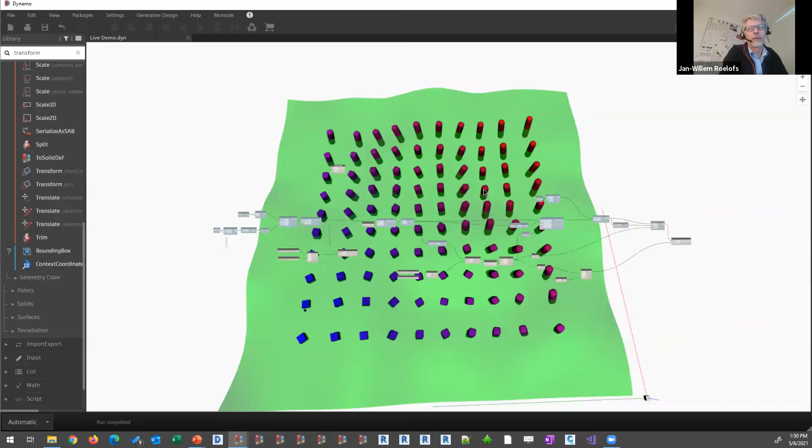What sort of issue were you having - were you trying to break some stuff down? I thought I put a file into the chat but I missed that one. I tried to split a solid into squares and rectangles, and I succeeded in part, but in the beginning I have three, and not all rectangles. I select all the vertical faces of the solid, and then split it.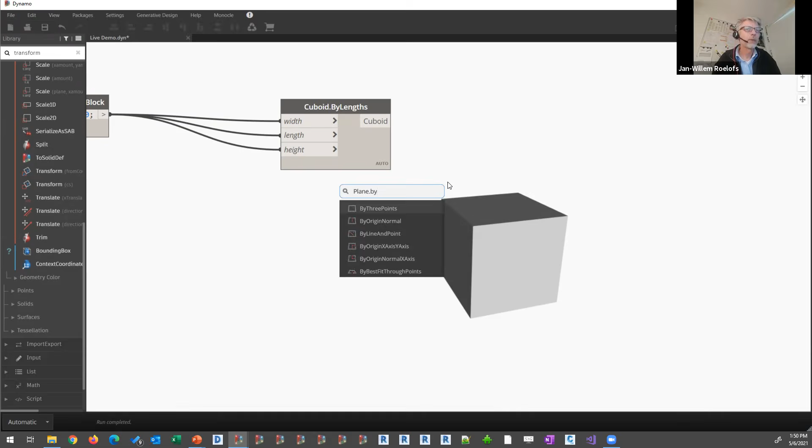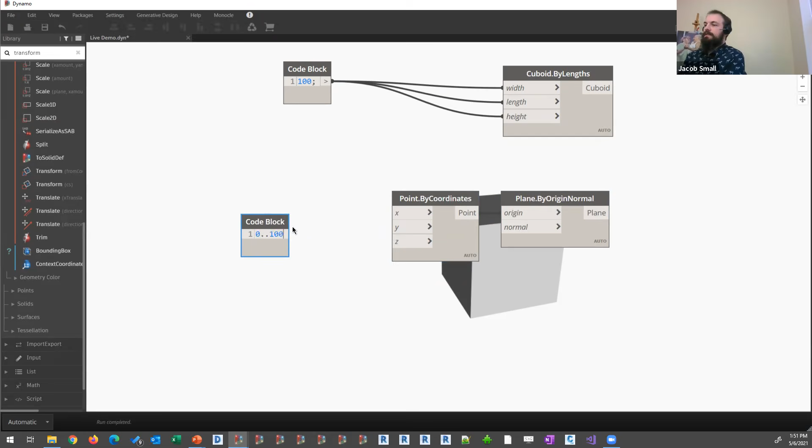So I often find that a lot of times people leverage custom nodes that they don't necessarily need to. Split recursively is one of those - many times there's an absolute need for it, but in some cases you can actually get by without it. So I'm gonna try and see if I can reproduce your issue.

So I actually need to start at negative 50 and go to 50 in this case. You want to dice one thing up by a whole bunch of different cuboids. I'm gonna step by not 1, because that's a lot of cuboids to calculate - I'll step by 10. And I'm going to use this as my piece here. Let's take our normal as vector dot z-axis, actually let's do vector dot by coordinates: 1,0,0 for our x-axis, 0,1,0 for y-axis, 0,0,1 for z-axis.

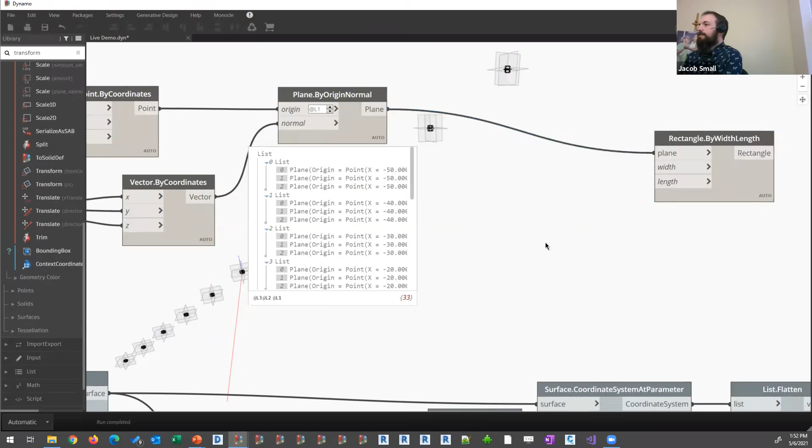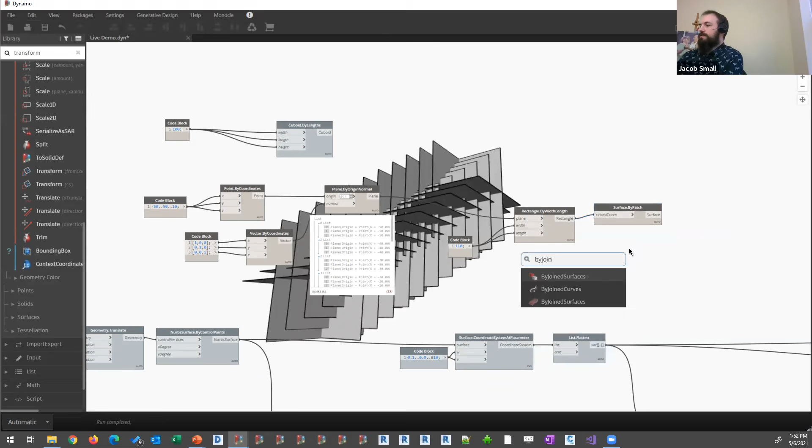Now you can see I've got a whole bunch of planes that I've built, and if you look at our list structure, we've built that content that way. With these individual planes, I'm going to make a rectangle by width and length. So I've got a list of planes - I'm going to make the width 110 and the length 110. That's a crazy grid of rectangles. By patch, we'll turn those into a grid of surfaces. By joined surfaces, we'll turn these into a list of polysurfaces. But first, I'm going to do a list dot transpose, so I've got all my vertical, horizontal, and whatever the other direction is of individual pieces.

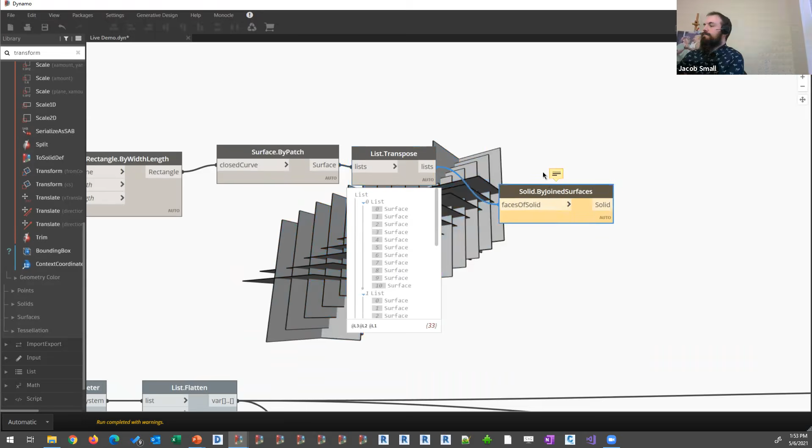And solid, you need surface. Yeah, there we go. And I need to go even bigger than this - I'm actually just going to go to 1,000. That's huge, right? But we'll hide everything.

And now split - we talked about this node earlier. It takes an individual piece and splits it by another piece. When I look at this, I get sort of three individual solids, but what I really want is to do this by the first piece. Split you - why is that not splitting?

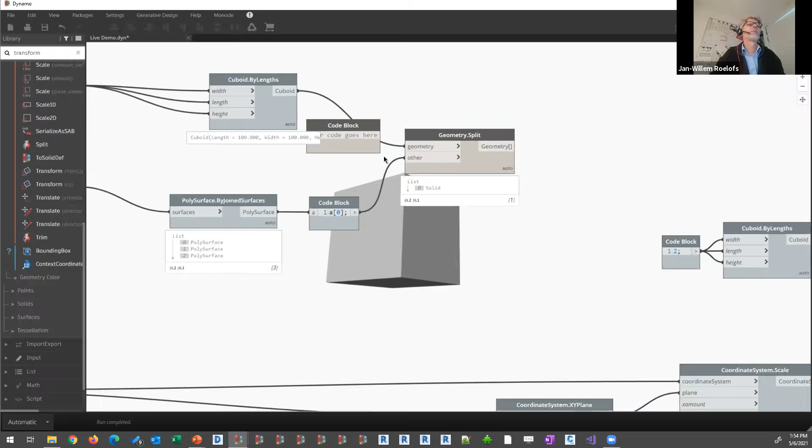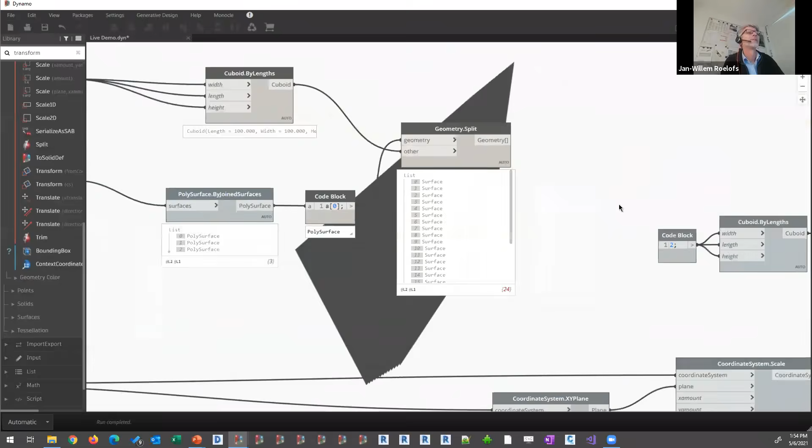You could try and intersect all in this instance as well - you could probably do that back with the planes as opposed to anything else. The split tool is only cutting by other geometry. Yes, so the split tool specifically requires multiple pieces of geometry, and that I don't have. But you can create pseudo geometry in this instance from things like our planes.

Yeah, I'm gonna have to figure out why that's not splitting. I know it works for a surface, but I haven't actually leveraged this on a solid before. Let me think on that, and I'll see if I can reach back out to you.

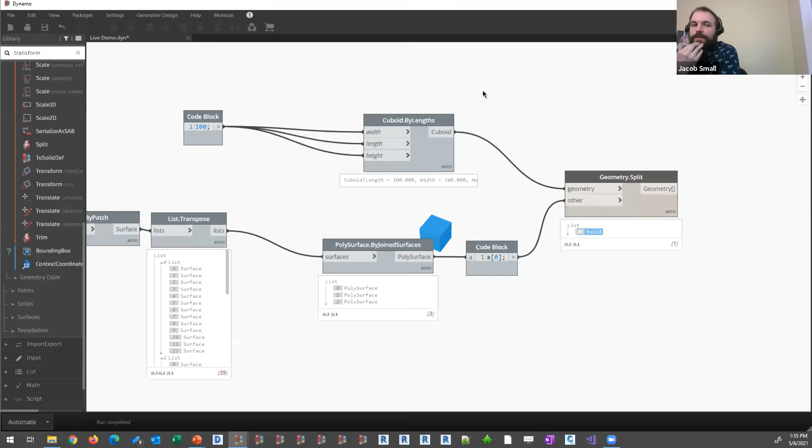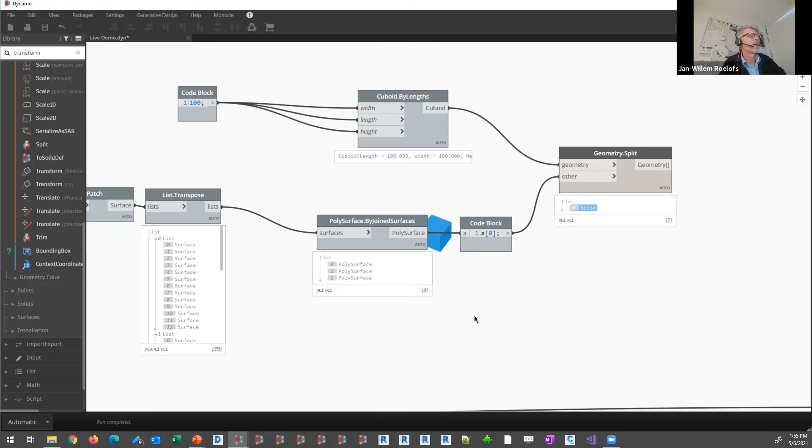Jan, quick question - are you getting a piece of geometry you want to split from somewhere else, or are you trying to create it out of the box inside of Dynamo? So from, say, coming in from Revit? No, I make it - it is in a family. Okay, I was going to say, because if you just want to generate something like cuboids here, you can just create a single cuboid and translate that in both the X, Y, and Z axes.

The beauty of live demos. We figure it out on the fly, and if we can't, we can figure it out afterwards. I'm about to say, let's figure this one out later, but I just wanted to check.

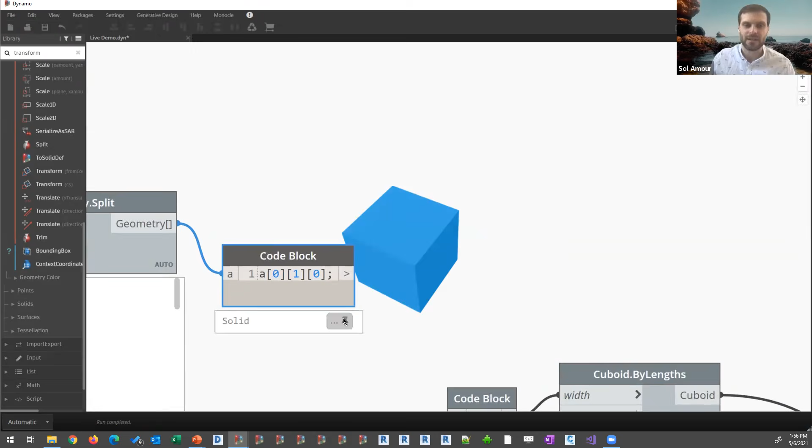We'll do our best to help you solve your problems. Yeah, I'm going to have to dig into how to split it without getting recursive. The one issue I find with recursion is the definition of what point you want to use as your remainder gets a little more complex as stuff goes along.

Yeah, but you can see what I managed to do is... very strange. I did put it in the Word file, some picture. I'll dig into it a little bit and see what we can find. We'll get in touch—I think going through the forum is going to be the best method for that. I can't see the file through Zoom or anything like that at the moment.